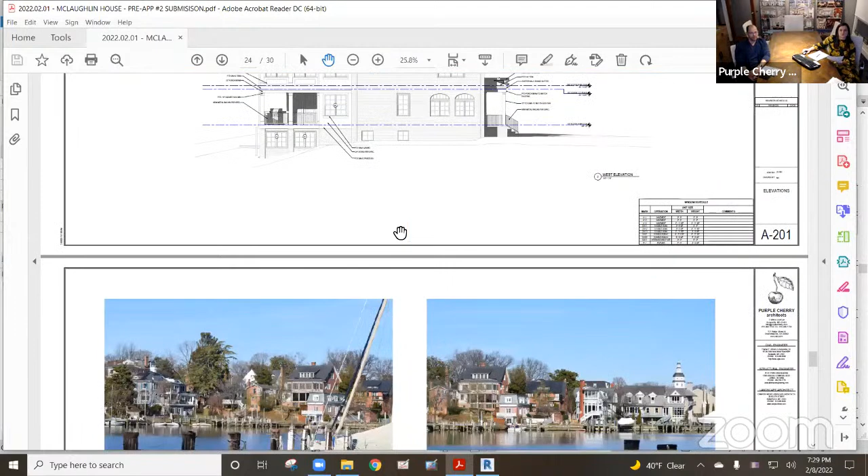The second comment was that the commissioners agreed the overall scale of the addition does not appear subordinate to the original house, so additional work is needed to bring it into compliance with Guideline B6. So per Guideline B6 we looked at everything, and the roof addition is designed with setbacks. On the first floor plan, our existing house is the shaded area, and the new portion is the wood hatch.

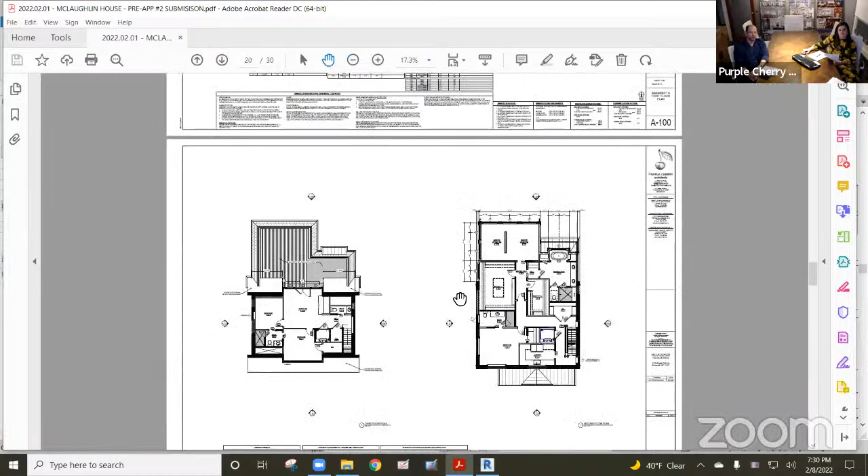As you can see, we are set back from our existing structure, and we are using a change of materials. Our original house is brick, and we're doing a wood paneling and siding system. The easiest way to see it is here: we have our existing brick, and then we do siding on both sides with that panel system.

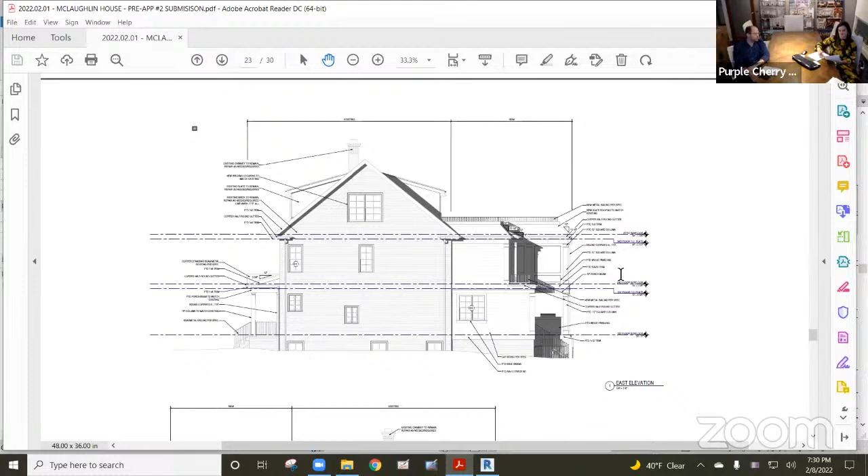The third comment we received was that the flat roof and trim are feasible, but the use of the roof as a deck is not feasible given Guideline D9, protection of the overall character, and removal of the window for access is discouraged. We would still like to file for the roof deck, but we've increased the slope of the roof so you no longer see the walls we used to have. Now the entire roof encapsulates the roof deck, and we've added railings at 42 inches of height for safety.

We are proposing to change the windows in the dormer to a door for access to that roof deck. But as you can see, it's still 2 fixed panels and a French door instead of 4 casements across, so it's still keeping in character — it's just a door instead of a window.

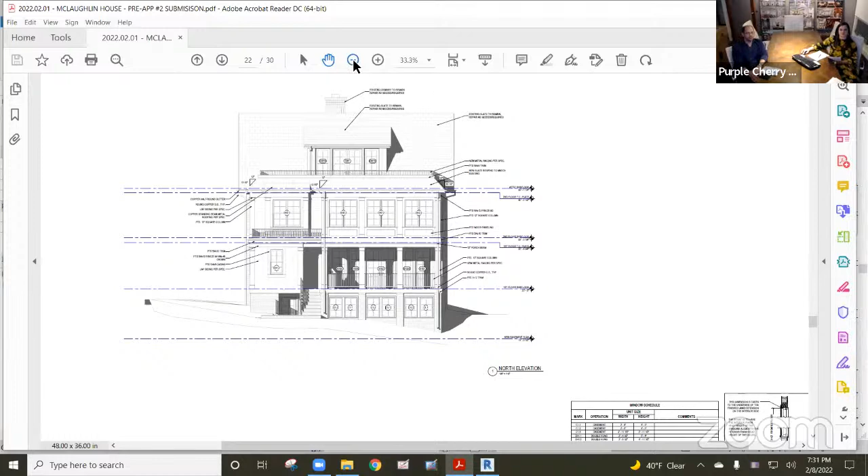The fourth comment was on Guideline A3, views from the water, which also has a bearing on the size of the addition. We did some perspectives from across the water, and as you can see, it's pretty keeping in with the neighborhood — you can see the other elevated decks at numbers 3, 5, 7, and 11 on the other side. I think I got those numbers right.

And so we are surrounded by elevated decks, some open, some enclosed. This just kind of shows everything that we've got going on around us.

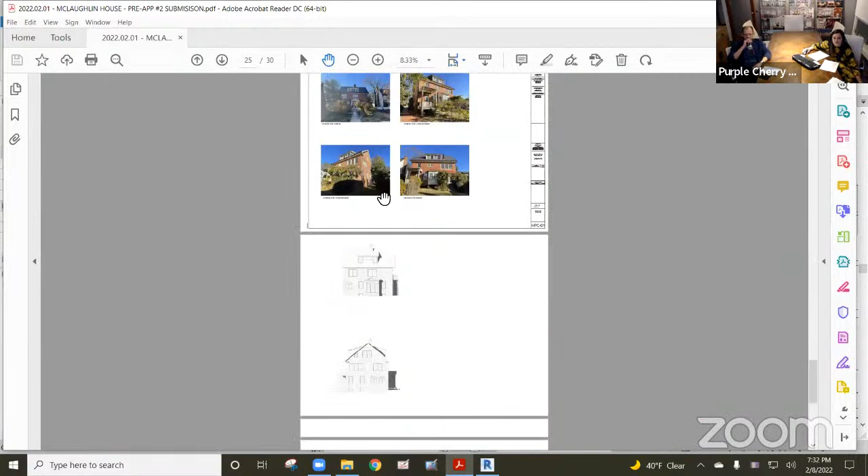For number 5, regarding the fenestration and the percentage of glass on our waterfront facade, we put together a diagram of all facades to alleviate any additional questions on the fenestration. We are under the 33% on our north elevation, actually at 26.5% glass on that side.

Our last comment was that in addition to the replacement of windows, that will be contingent upon a window survey. We have decided we are not going to replace the windows. We reached out to a contact that John Tower connected us with, and he's very comfortable restoring the windows. We're proposing new windows on the new portion of the house, but restoring as many windows as possible. We spoke with John on the side — if during construction we find out we do have to replace a window, that'll be an administrative application per each window. Should we ever get to that point, we'll work directly with John on that. We did have an addition of a landscape plan this time, and wanted to point out a couple things.

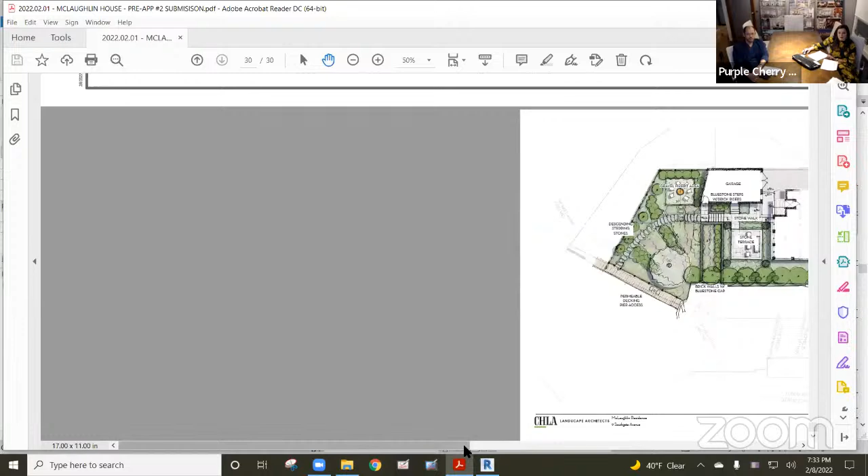We are proposing to restore the driveway in all brick. We don't want to change that material — they love that very much. And we're doing bamboo mitigation over here, so we're not blocking our water views or the neighbors' water views. It shows the garage, but that's the next one.

Other than that, we'll have a conversation about it. Matt and Carrie, is there anything else you want to add before we move on? No, I don't think so. No. Okay, alright, well thanks. Thanks for setting that up.

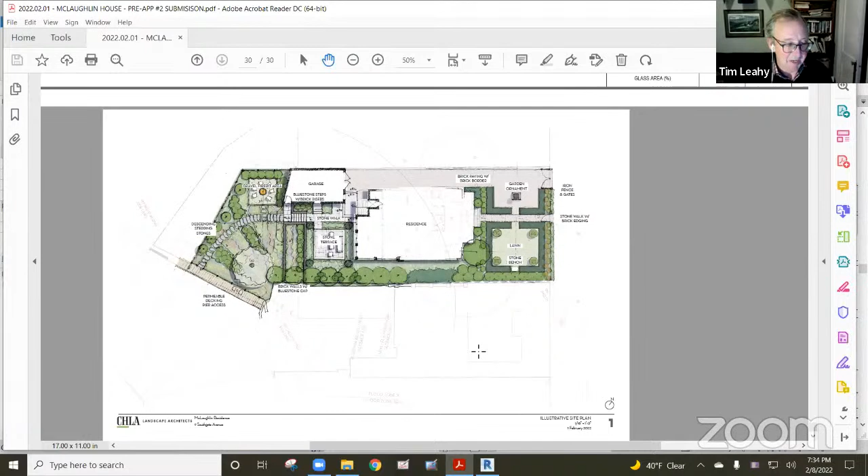Why don't we go ahead and have a discussion, and go ahead in the sequence that you just presented, Carrie, or Maria. The dormers — thank you for complying with that. The roof structure doesn't change, and that was important.

No news is good news, right? Oh well, please comment, commissioners. I have my thoughts, but I will hold.

Well, for me, we've requested differentiation, and I think we want more than we currently have. I mean, not being an architect, I struggle with what is the norm for something like this. I'm hoping that one of my co-commissioners here, who is an architect, can give me some additional information in terms of what would be considered enough differentiation so that the addition to this house — I understand it's a different material, and I understand there is some differentiation — but what could we potentially be looking for that would be considered appropriate in this type of situation?

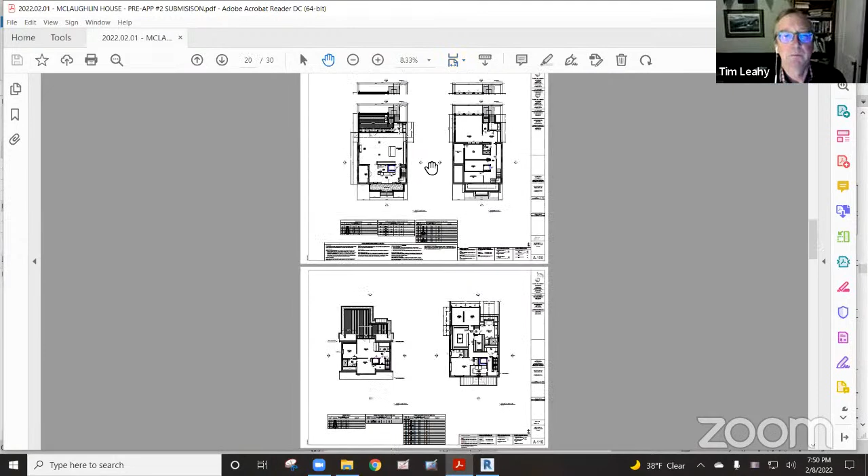So, 8 feet, and then the porch is an additional 15, so 23 feet total. The top level is a fully solid mass, while the lower level is a porch and a solid mass. Okay, thank you for that information.

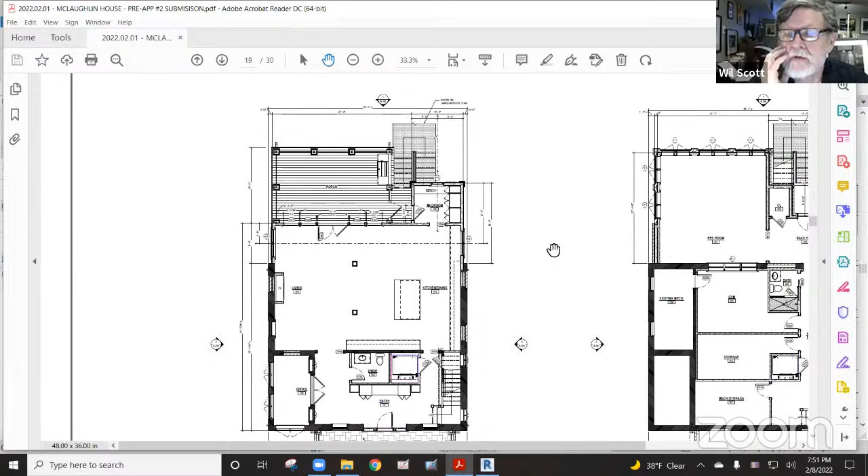I would just reiterate, this is a very large house on a very densely developed shoreline, and it's still going to be a very large house on a very densely developed shoreline. At the moment, I'm comfortable with what's being proposed. I don't know what you could do other than shrinking the whole addition that could substantially make it subordinate, and I don't know that that would satisfy anyone's concerns who is concerned about it.

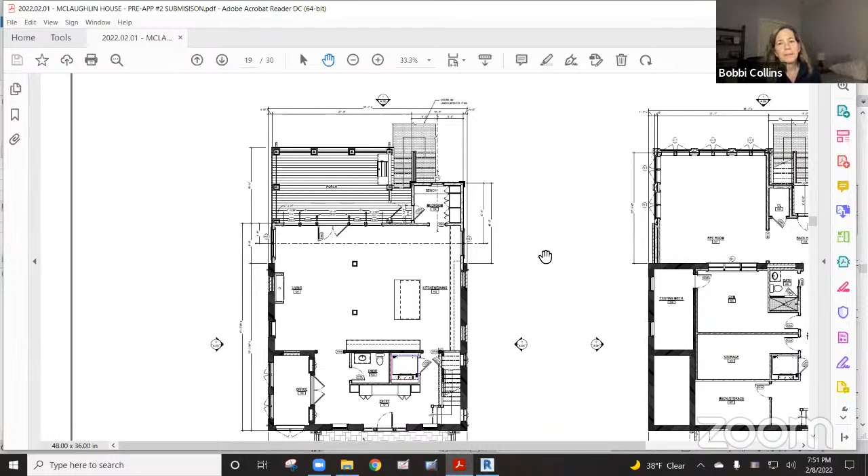Okay, thank you, Tim, for that. Question for you: what are your thoughts on the rooftop deck? Let's go to that next. I have strong feelings on that. So you've heard some of us have reservations about the massing, and some don't. Take that on board.

I still would say that simplifying the level of detail would also make it subordinate and less formal. This looks like it's attached to a very elaborate, fancy house when you've got a very simple brick structure. Understood, thank you, Tim. I would agree with that as one approach to address the concerns that have been raised. I think that's definitely an option that we can review.

Alright, okay, then let's move on, if everyone's okay—any further comments on massing in B6? Can I speak? Of course.

This is a minor point, but in the pictures, the porch area on other houses—for instance, number 3, the Mulligan house, three doors down. Is that the white one? That one. So if you look at that, there's a garden level, and above that there are windows. Those windows register as black in the picture. On the third floor, there's a porch and a balcony, and that's open and light. I think that's consistent in your pictures.

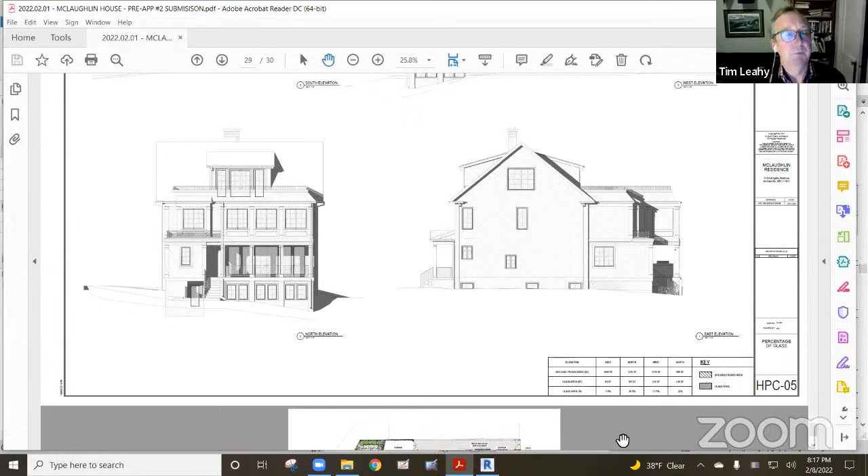All right, next - would you mind scrolling just to those numbers to show? Absolutely, Tim. And Marie has it memorized - it's the south facade, or the water facing facade, had the appearance, and you did not include the roof in this facade when calculating, correct? Correct, you'll see there's no hatch pattern over the roof - that was our interpretation. So the amount of glass is, I think it says 20... 26.5. All right, so I think you've satisfied our request.

Awesome, any commissioners have any questions about that? That's just - so the renderings are a little different from the actual elevations. No, this is just a diagram highlighting glass versus facade, it's the same elevation. The one thing on the rendering is it sort of suggests that the face closest to the water goes all the way across the back of the building.

It does, and it actually steps back and that makes it look hugely different. And it only steps back - goes, what, 2/3, maybe a little less? There is a jog back in the actual perspective, so I do agree with you that it is generally a little bit hard to understand or distinguish, but yes, it does step back - there's about 2/3 at the end, and then it steps back into a bay.

And that was Kevin's idea, that swapping these two you might reduce the massing. Well, I think this is a great representation that shows the mass is broken more than the pictures. I totally agree, John - on this perspective it is subordinate. It's the east facade where I still feel it is not subordinate.

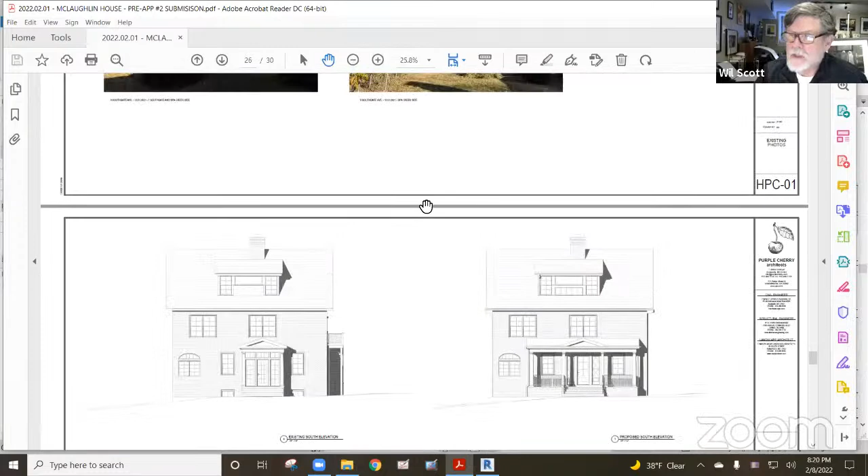Agreed, Tim, and the detail is less elaborate as well. I think this is all very worthwhile discussion, but I think we all could be helped to make our final decision with photographs from the four cardinal directions. My concern at the moment goes back to what I was saying earlier - this whole area is very densely developed. I don't know how much you're going to be able to see of the east side, but if I have a good picture, we'll all understand better what can actually be seen. So can you go back to the side view?

I just wanted to see where you have the water view and the side view together - I think it was 29. Okay, so as you're looking at the north elevation side view, it's kind of confusing, the roof line here.

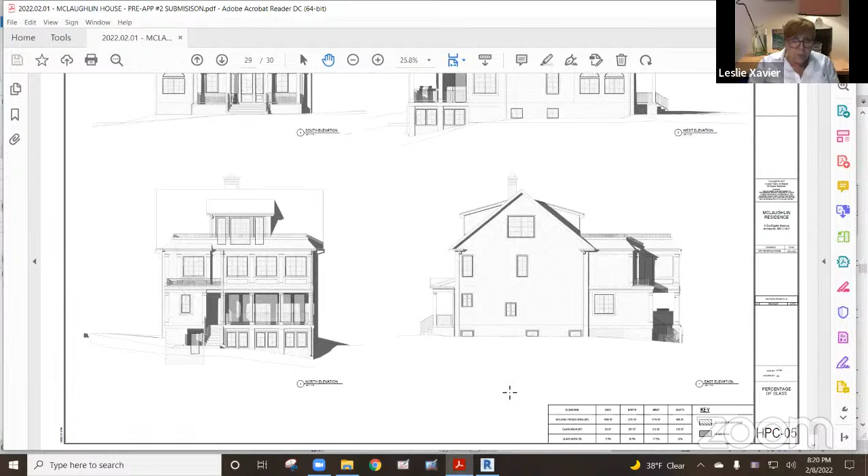When I'm looking at it from the actual water view and from the side view, that porch looks - there's just something strange and wonky going on there. Can't figure it out. I think what's a little confusing is this is a graphic representation of our fenestration.

Diagram, so if we jump back to our perspective - I totally get what you're saying. I think this might be a little easier to understand or read. We're trying to break it down as much as we possibly can for you guys. Sure, I understand. Does that help at all? Yeah, I mean...

When I'm looking at the elevations themselves, I have a different feeling about things. So I don't know, Tim - would you say that maybe if they redid, like Will said, all the different sides to get a better perspective as far as the photographs? No, I agree with that.

My concern is the massing of the building on the east side and the level of detail of the trim. It is not subordinate to the main structure. This is more subordinate - it's obviously much smaller and less decorative. Exactly.

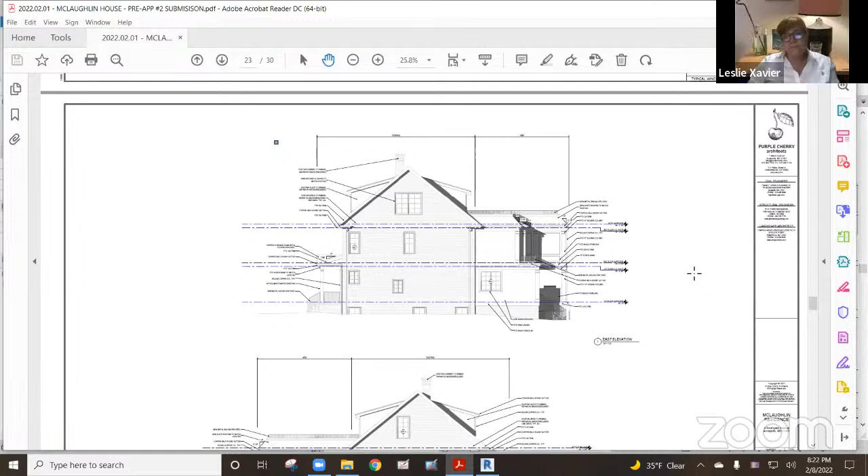Tim, is it the perspectives that make it appear more decorative than it truly is? Yes, possibly. A lot more mullions and trim - it almost looks like a jewelry box. Yes, agreed, it looks super formal to me with its trim. Again, over-differentiated, I would say. Okay, we could certainly look at ways that we could simplify.

Okay, so we're good on the 33, less than 33%. And I appreciate you doing that math - that helps us. Any other thoughts on that?

And then finally, the windows. That's wonderful news that you've done that research, and we really appreciate the effort you're going to on that. And honestly, I do want to thank John Tower - obviously we've worked very closely with him, met with him, had numerous conversations with him. He's been a great support through this project. Obviously he's made recommendations, and we're ready and willing to work with him. Matt and Carrie are willing to do what you're recommending, as John is guiding.

That's super - it's such an important aspect of preservation. The windows are the most important character. The roof and the windows tend to be where we discuss things. Certainly, and Tim, John has pushed that into us.

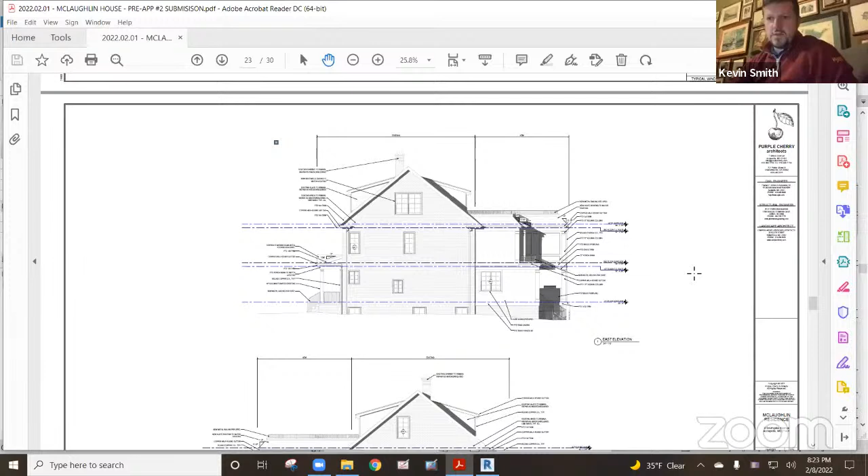I have a question on the window calculation. Go ahead, Kevin. What's labeled as the west side - there's a rather large window on the second level removed, and one window on the first level removed. Is that being removed regardless of the extension, or were those removed to get to the window percentage? It was actually removed for egress purposes. The entire top floor is finished space, but we have a bedroom in that one space where we need to meet the minimum code requirements for egress. Currently it's maybe a 2x2 window or something like that.

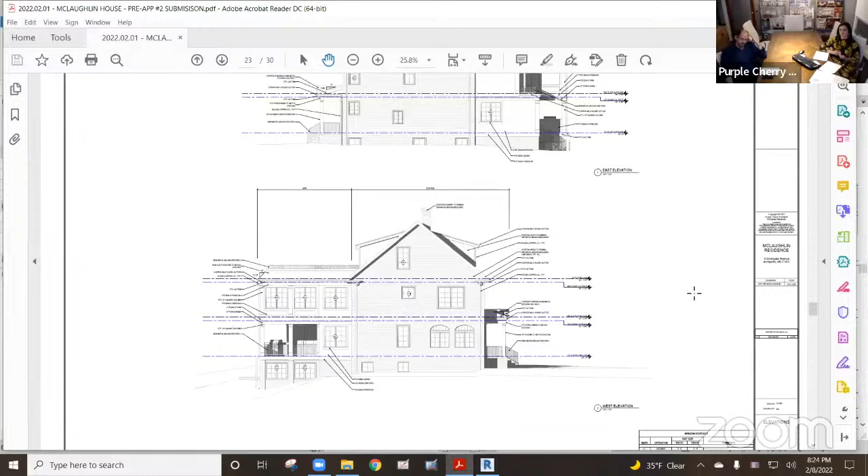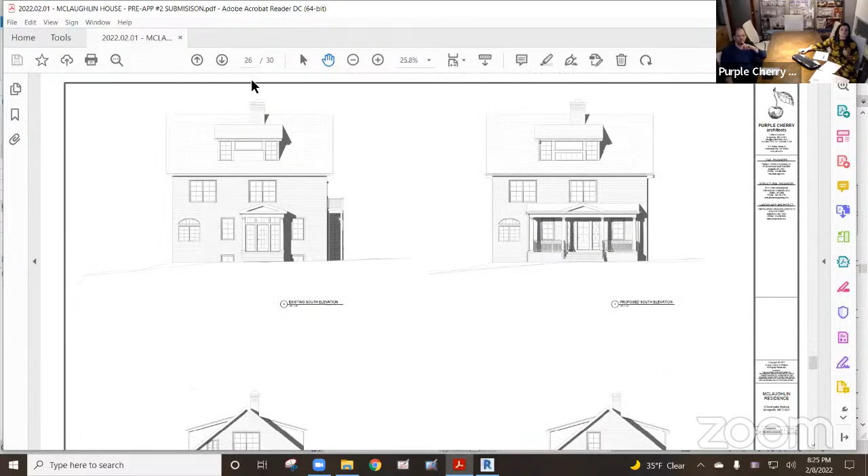Yeah, I see that one - small, but each of the three levels has a window removed, right? The second and top floor have windows removed or modified. Yeah, because I'm on page 26 of what was submitted. Okay, well let's go ahead and jump there. So there's the 3-pane window on the second level, and the 1-pane window, the furthest to the rear on the first level, is removed as well on that drawing.

On the upper left-hand side, the lower elevation. That's the existing, right? Correct. There's, however we count, 1, 2, 3, 4, 5, 6, 7, 8, 10 total windows, and then on the proposed there's 8 total windows, right? Yeah, you would be correct that those are based on the plan, interior plan modifications.

I think ultimately they're not necessarily perceived from either street or water view. Again, that is not an... understood. I'm sorry to keep repeating it, but thank you for drawing our attention to this, Kevin. We got a little distracted, I think. Yeah, I mean, it removes... this facade actually is completely changed.

And the third level windows are quite visible. I understand your egress concern, but it really changes the balance. Like we're saying, it's a very simple structure, and that's what's fantastic about it. We're trying to minimize those changes, and we discourage removal of existing windows. You're going to need to repair brick here and insert new brick. So thank you for picking this up, Kevin. We had not noticed this as a possibly non-compliant area.

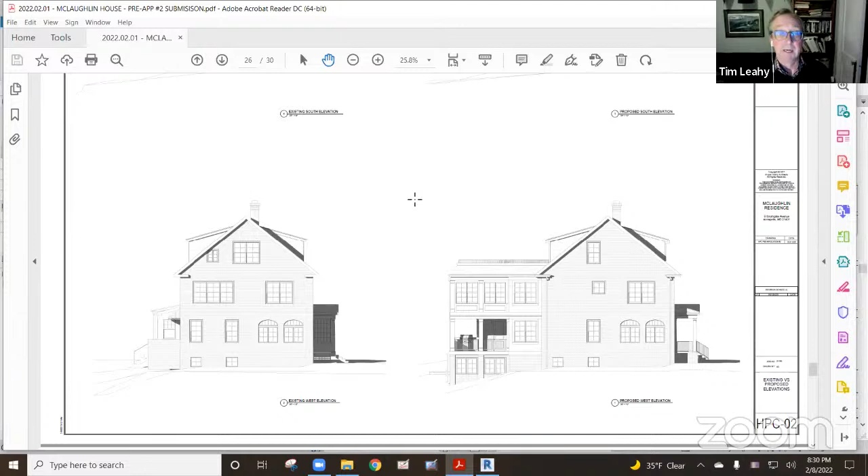Okay, new issue. Did we hit all the comments? Yeah, I think we did. Again, okay, Kevin, good eye on that. Well, right, looking at windows, the opposite side as well has quite a few windows removed, so it has the same effect. Yeah, so that's this page.

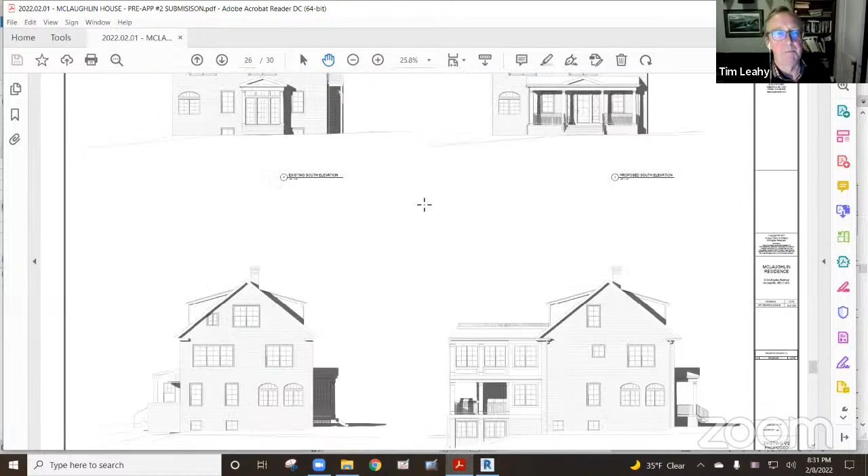Well, it's labeled the east facade, but the same thing—there's multiple windows removed on this side. There's a lot of movement of windows here. Can we see the actual photographs of the side of the house, please? We will, yep, they're here. Changes quite a bit. These all look original.

Excuse me, John, what's the date of the house, the original construction? I think I'm guessing here, 1915. The owner, maybe Matt and Carrie, do you know? Yeah, that's what we were told when we purchased it, 1915. And is the architect of the building of local, national, or regional significance? No, he's just a builder who put up a house in 1915.

It is a contributing structure, though. There's an unusually low level of ornamentation. It's not by a historically significant architect. It doesn't even seem to be, to my eye, easily classifiable in terms of style. It's a rather workmanlike job. So it's weird looking, it's odd, there's no balance, there's no symmetry. Yes, that's exactly where I'm going.

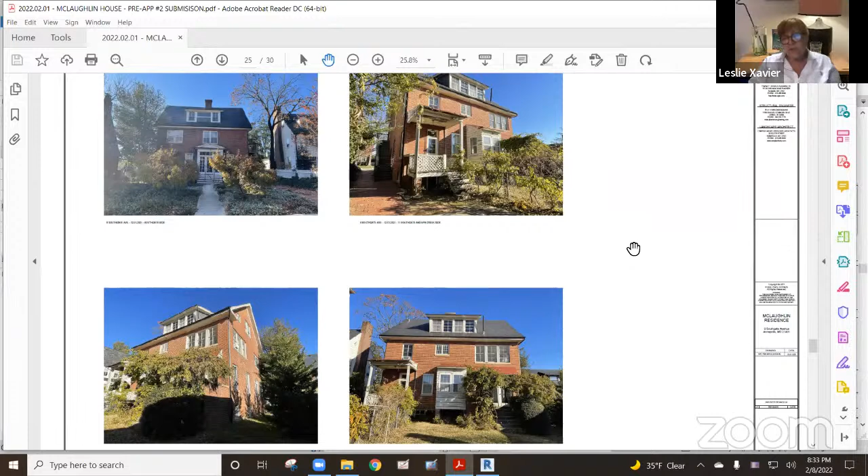So how important is it in the end that we preserve every window where it currently is? But is the floor plan itself relative to the location and the nature of these windows? The existing for the new. That would go back to my question, though, Leslie, the same thing.

So this isn't representative of a historical style. It's not representative of an individual architect's taste. It's not the home of a historic figure. We want to protect it, but in terms of moving some windows or subtracting or adding a few windows, I remain to be persuaded that that's of high significance. Just one commissioner's opinion.

I would say you are arguing that a lenient standard should be applied, as opposed to a strict standard, which is what I would be arguing for. Well, that won't be the first or the last time. Exactly.

And removal of historic fabric is something that we talk about. The brickwork here is also not generally considered good for strict application. But I think we've raised the point to the applicant that there's a lot more movement of windows than we have discussed. Less movement of windows would bring it closer to being feasible. I would agree with that.

Tim, I don't think we necessarily added any further concerns, but if it was not noticed or recognized in our previous pre-app, we recognize that. I think the one thing to consider is there's quite a bit of pointing up the brick, or possible brick repair that is necessary due to structural concerns and/or movement of the structure. So that's something we've discussed with John, and we know we're going to work with John on how we proceed with that, and obviously you'll be involved in that process.

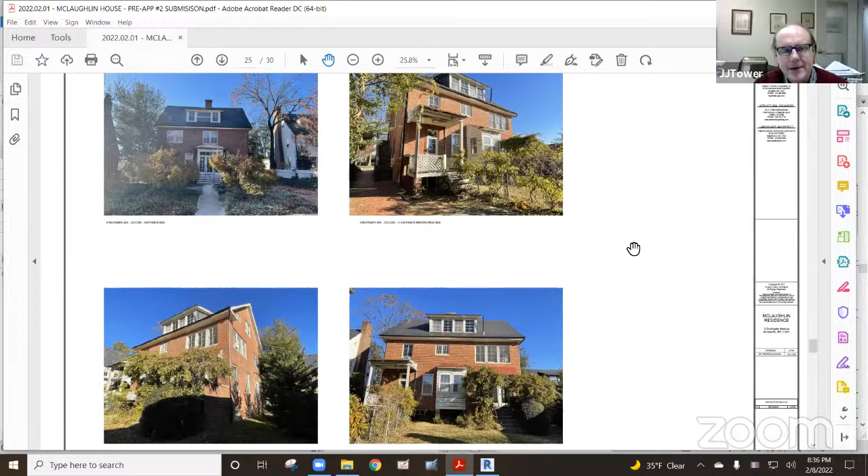John, we're going to make you exhausted by the end of this project, because we're going to have you out there every week. There will definitely be a palimpsest where these bricks were, a pattern. And I think if there are any bricks that are removed that can possibly be reused, we're more than willing to try to do that. Obviously, we're not trying to give a false sense, but we're trying to minimize or mitigate any concerns of alterations. I think for the dozens of masons that I know, only two will even attempt to do that.

Understood, we will reevaluate our windows as well. Now that you've decided, of course, that you're going to repair them, that will become more significant. Certainly. Okay, if there's no other discussion, I'll go ahead and summarize.

Regarding the pre-application for 9 Southgate Avenue, the applicant and architect have addressed prior comments regarding compliance with Guideline D9 and D11 having to do with subordination. Regarding D9 and D11, there's no change to any of the dormer structure, so that has been addressed.

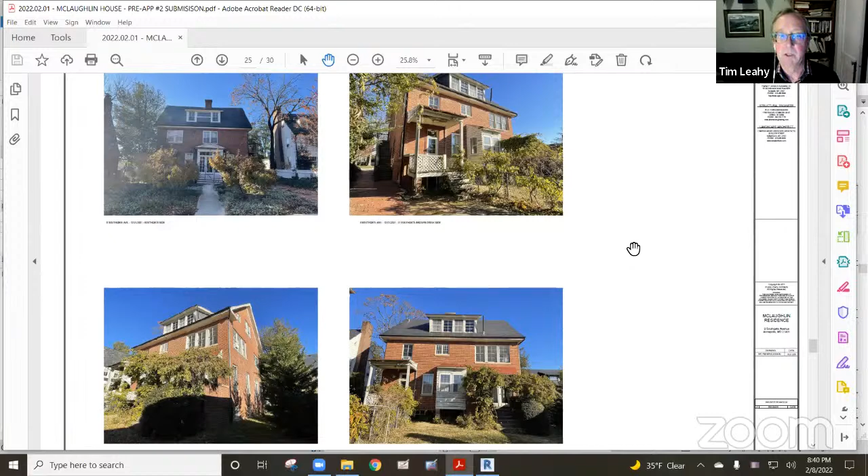That had to do also with Guideline A3, regarding views from the water appearing to be a roof deck. The applicant did a complete calculation of glass percentages on each facade in regard to Guideline D19, and it's clear that the proposed design is less than 33%. But a new discussion ensued regarding the movement of existing windows, and the applicant is encouraged to move fewer windows, destroy less historic fabric, and require more modern repair of existing brickwork.

Again, there are differences of opinion as to how strict the review should be on this relatively simple building, and we look forward to less change, but we're not completely closed to any change. I'll word that better.

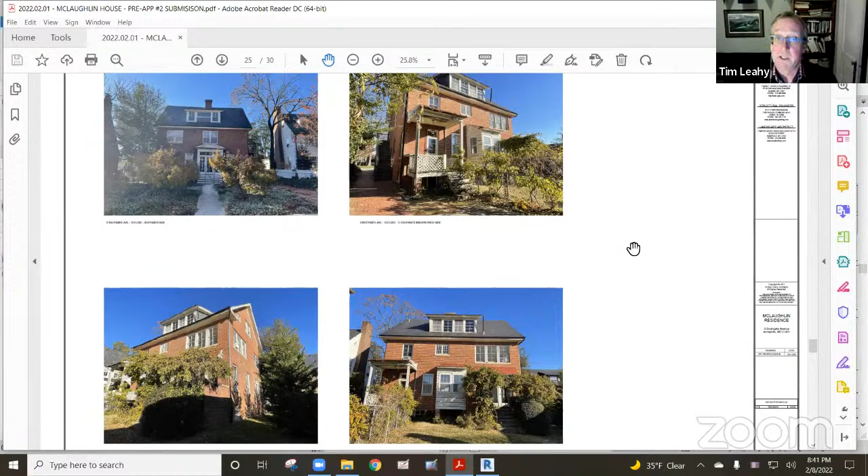And finally, the applicant has very gladly and happily decided to restore the windows instead of replace them, which is very important. So a survey is not going to be required if you're basically restoring. Reuse of existing windows in the final design is encouraged as well.

I feel like I missed something. Did I miss anything, commissioners? Okay. Well, I hope we gave you enough. Did we give you enough to further your project?

You gave us a lot of great feedback. So I honestly want to thank everybody, especially for your time this evening. And we look forward to our next application or pre-application. All right, thank you for participating. And again, thank you to Matt and Carrie.

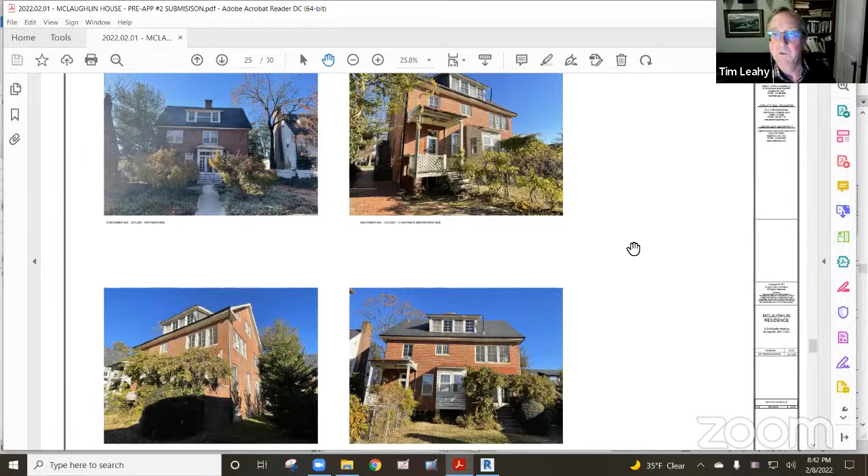Do you have anything in addition you would like to add? No, just thank you very much for your time, really appreciate it. Thank you to the McLaughlins for understanding how important it is to join us in our community. And we certainly agree with everything you're saying and why people buy in the historic district. Great, it's unique. Thank you. Awesome. Thank you. Thank you.

Next item on the agenda, I'll be brief. Administrative business. Hopefully everyone had an opportunity to review the 2021 annual report. We submitted it already, John submitted it already per our requirements, and it's always impressive the volume that you see in that report when it's boiled down to a table. And also the same thing about the administrative approvals. Look at the volume of work that is actually accomplished by John's office. It's truly amazing, so shout out to John and his group on that.

Oh, you know what, I knew there was something I forgot. On the pre-app, we didn't talk about the landscape plan, which was submitted this time. So John, could you communicate that to them? I don't want to have a discussion now. No, I'll communicate with them in the AM.

There's different lot coverage issues, and I think I would draw attention to it. It would appear in the front yard there were two parking places. I didn't see that. It looked to me like there was a paving with a landscape feature that looked like two parking places, a paved area that looked just... if you could, we're going to need to talk about that. It could possibly be addressed in the final application if they don't want to do another pre-app, but I would have a conversation there. I knew there was something.